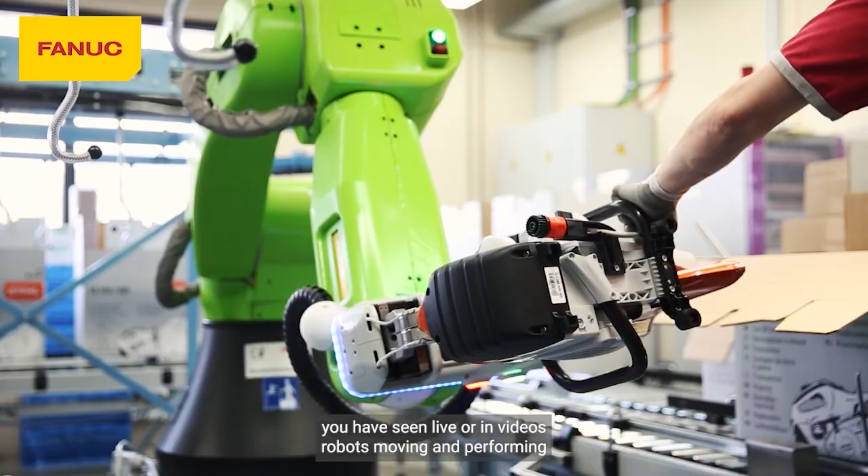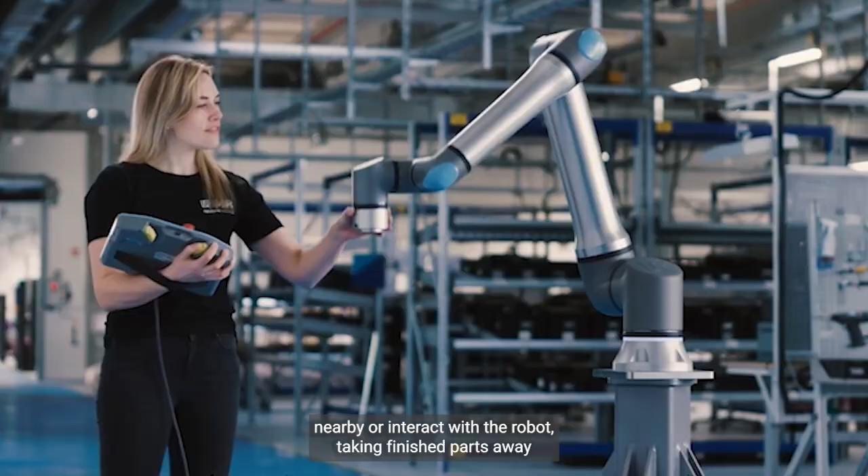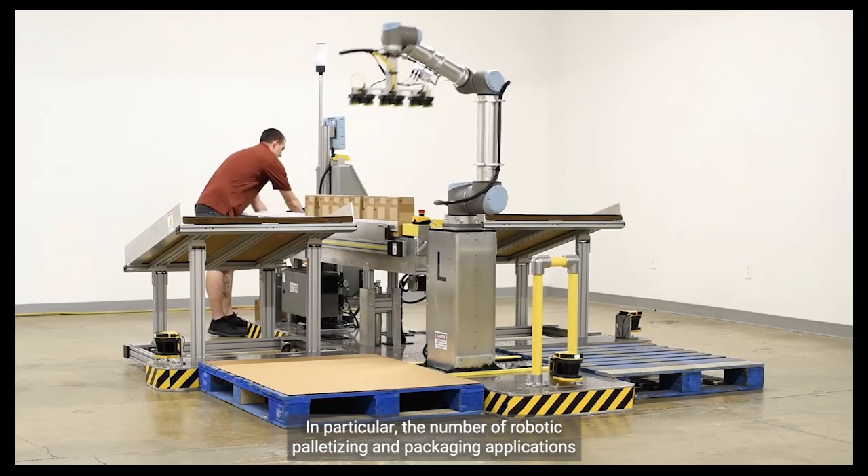Likely you have seen live or in videos robots moving and performing diverse operations without any fencing or other safeguarding around them. People just walk by, work nearby, or interact with the robot, taking finished parts away or placing raw materials on a work desk for the robot to proceed. In particular, the number of robotic palletizing and packaging applications that run without apparent safeguards is growing.

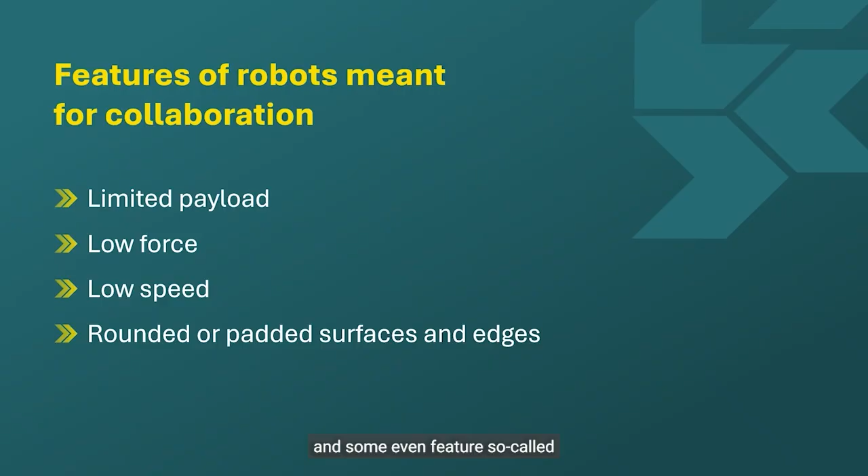The robots used in such applications have special features. Most important of these are limited payload, low force, and low speed. Some may come with smooth, rounded, or even padded surfaces, and some even feature so-called sensitive electronic skin that senses contact with the human body. The basic idea is to prevent injury upon contact between the robot and the human body.

Such robots are often referred to as cobots, a term derived from collaboration and robot. The term cobot is mostly used to advertise robots that allegedly can operate without guard fencing and protective devices like light curtains, laser scanners, etc.

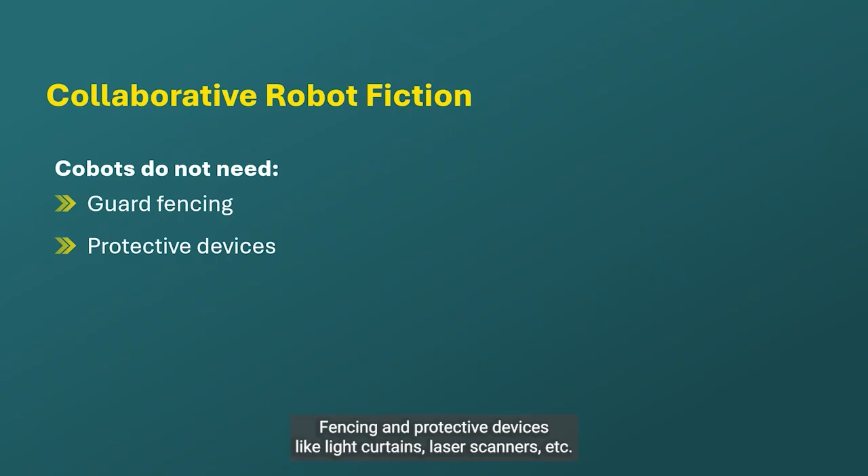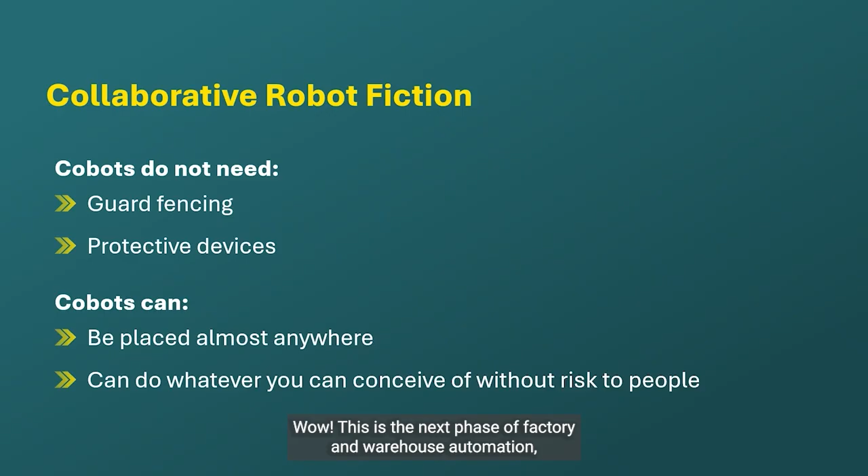Advertising videos show such robots operating almost anywhere. You can also see them on trade shows and fairs as they place products into crates and then stack them while onlookers stand right next to them. What is the impression you get? Wow, this is the next phase of factory and warehouse automation, only to be followed by Mr. Data and his Android colleagues.

But what appears to be a smart concept at first glance, in reality is a misconception, at least to some extent. Robots that will always work safely around people in any kind of application simply do not exist. It is not the robot alone that counts. Cobot is thus a somewhat misleading term that makes people believe that they do not need to give much attention to safety when such a type of robot is used.

Interestingly, the US and ISO standards for robot safety have never used the word cobot, and the terms collaborative operation and collaborative robot have been removed from the standard. Let's probe why. The new ISO 10218 standards published in 2025 and the US pendant ANSI A3 R15.06 use the term collaborative robot applications. This highlights that the application determines whether use of force and speed limited robots is safe or not.

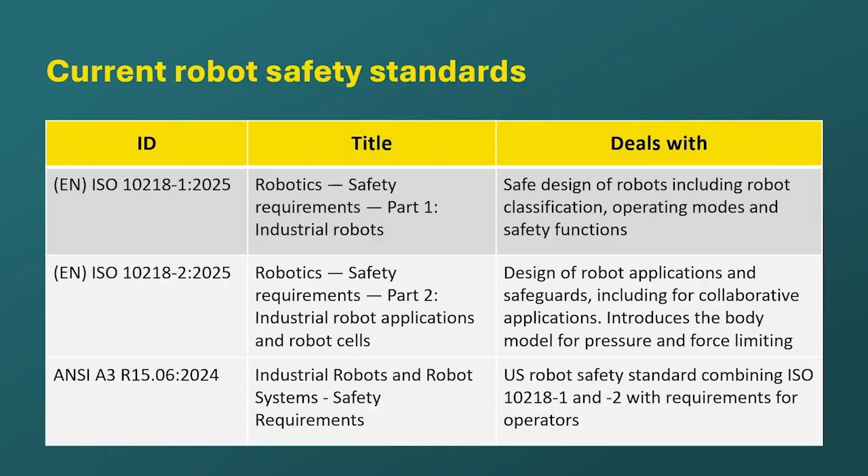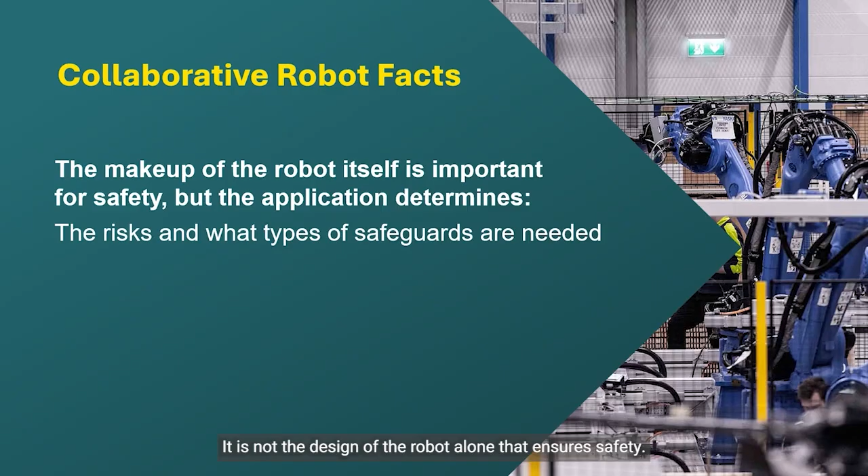Fact is that the makeup of the robot itself is important for safety, but the application determines the risks and what types of safeguards are needed to deal with them. It is not the design of the robot alone that ensures safety. The new standards list numerous factors that must be considered to achieve a safe collaborative robot application.

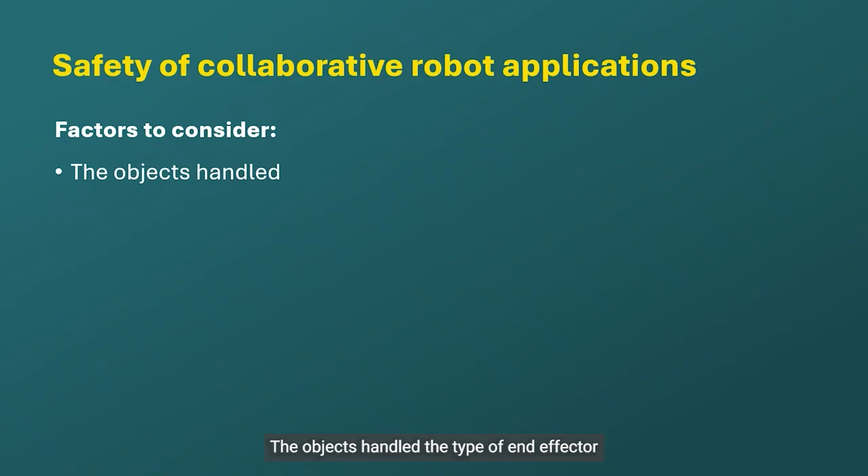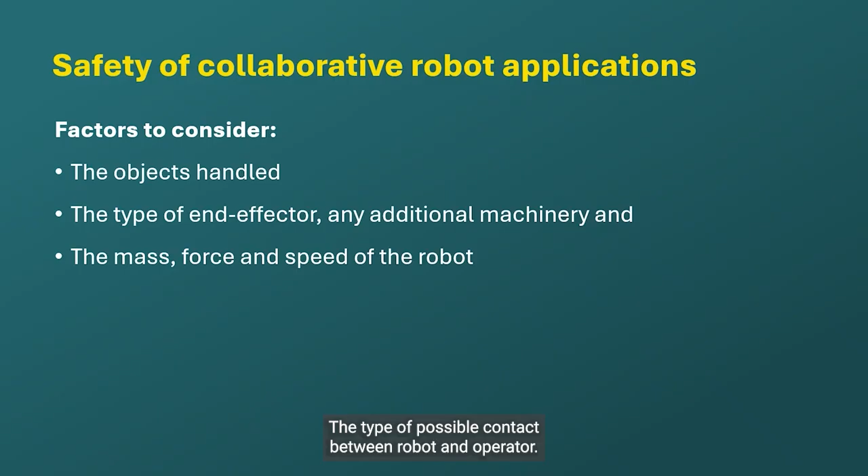The objects handled, the type of end effector - that is, the tool or manipulator - any additional machinery and equipment used in the application, the mass, force and speed of the robot, the type of possible contact between robot and operator, the body parts affected, the space available, the surroundings and even traffic, and the number of operators, bystanders or walkers. Together, these factors result in a complexity that needs careful forethought, risk assessment. We'll come back to that a little later.

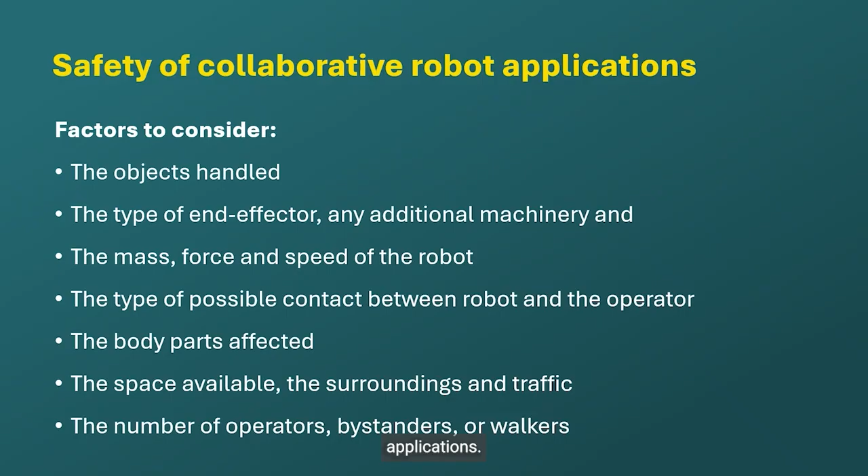Let's first look at force and speed reduced robots for collaborative applications. The new versions of ISO 10218-1 and ANSI A3 R15.06 differentiate two types of industrial robot. No, the differentiation is not between cobot and industrial robot, but between Class 1 and Class 2 industrial robots. Let's see. The difference between Class 1 and Class 2 industrial robots is in their manipulator weight, maximum force per manipulator, and their speed. See the values here.

Manipulator mass of Class 1 robots is max 10 kilograms. The maximum force allowed is 50 Newton. The maximum speed at the relevant tool attachment point is 250 millimeters per second. You may be aware that 250 millimeters per second motion speed is the limit set for manual operation of industrial robots. This is roughly a quarter of normal walking speed and thus quite slow.

The manipulator mass and force limits are new. These values are considered low enough to ensure that people will not normally be hurt upon contact with the moving robot. Consequently, the performance level requirement for safety functions of such robots has been reduced to PLR B or SIL 1.

Any robot exceeding these limits is a Class 2 robot. The standard PLR for robots in Class 2 is D or SIL 2.

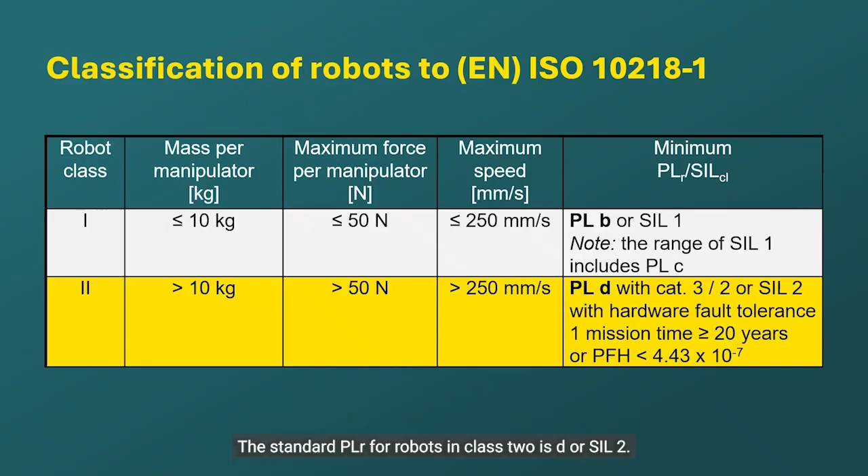Clearly then, Class 1 robots are meant for collaborative applications. But does this mean that simply selecting the right type of robot will automatically result in a safe application? Does it mean that you will never need to use guards or other protective devices?

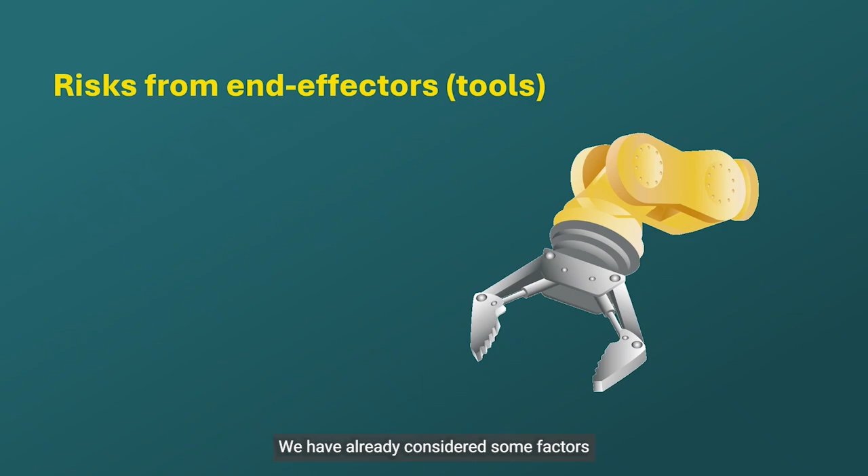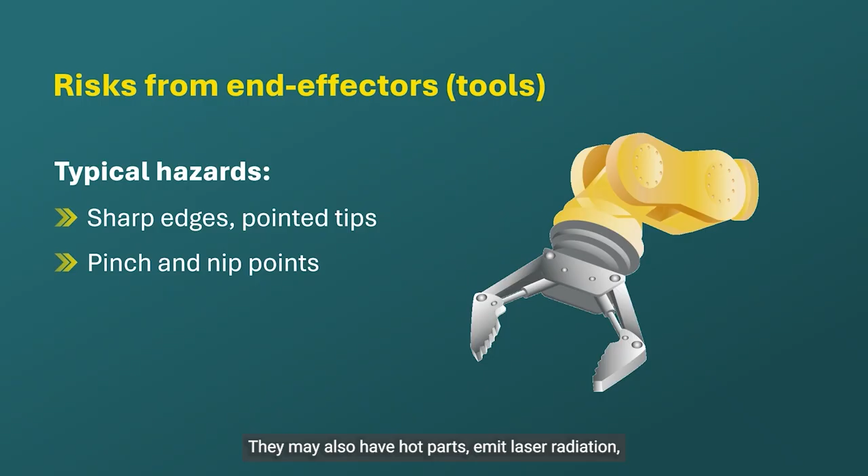We have already considered some factors that determine safety of collaborative applications. When you think of the wide variety of tasks that can be handled by robots, additional risks likely come to mind. The end effector, the tool of the robot, may have sharp edges or pointed tips that can cut and pierce, pinch and nip points. They may also have hot parts, emit laser radiation, or apply and inject hazardous materials such as adhesives.

Most of these risks can be controlled in some way. But there's an ingredient of collaborative robot applications that is much harder to predict and control: the behavior of operators and bystanders. The basic idea of a collaborative application is to have a machine and at least one operator share the same workspace. The type of collaboration may be sheer coexistence, but in most cases it will involve interaction.

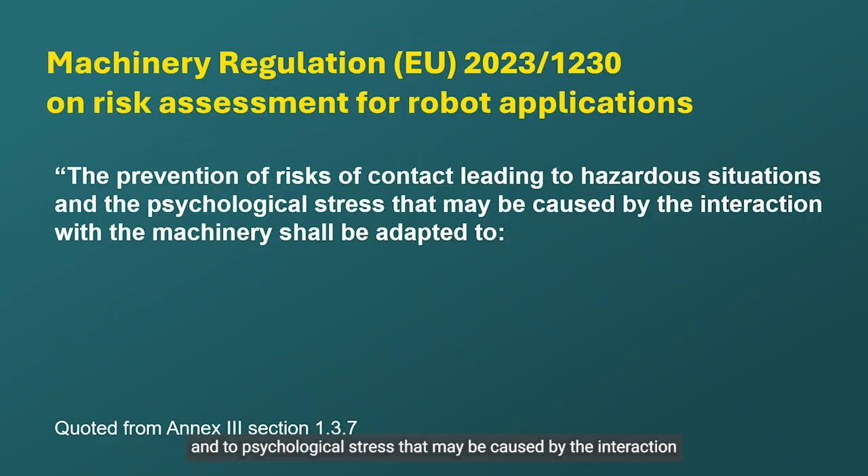The machinery regulation, applicable as of 2027 in Europe, therefore requires the following: the prevention of risks of contact leading to hazardous situations and the psychological stress that may be caused by the interaction with the machinery shall be adapted to A. Human-machine coexistence in a shared space without direct collaboration, and B.

Interesting enough, the MR focuses not just on physical harm, but also on psychological effects of working closely around machinery that is potentially hazardous. Technology should not scare people or make them feel uneasy, tensed, or on the spot.

Also note that the machinery regulation prompts manufacturers to consider not only the risks of interaction, but also those resulting from mere coexistence in the same workspace.

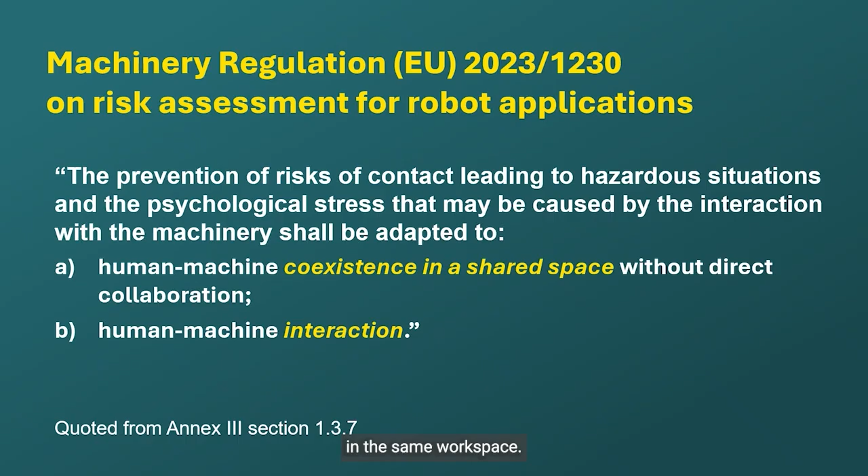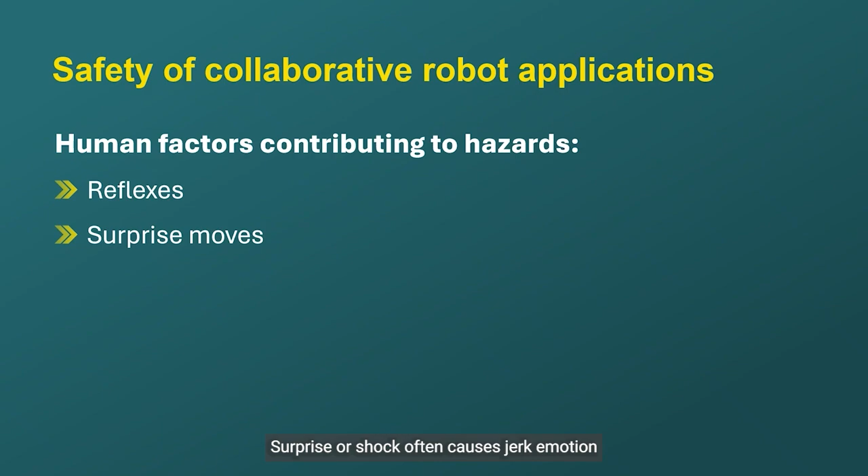Today already, a robot's next move may surprise an operator, and human reactions are often based on reflexes. Surprise or shock often causes jerky motion or a step in just the wrong direction. Also, people are sometimes distracted or may misjudge or misunderstand the operation and its safety limits.

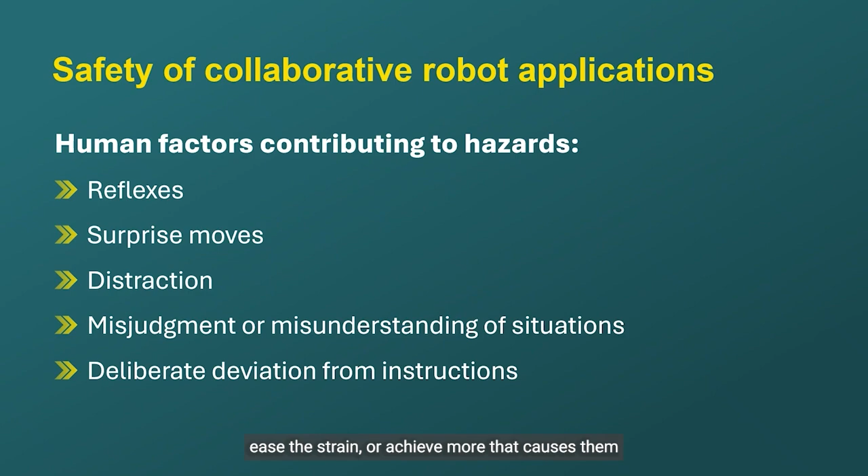And last but not least, operators sometimes deliberately ignore or deviate from instructions. Their motivation rarely is ill-willed. It is the natural desire to be comfortable with the work situation, ease the strain, or achieve more that causes them to take shortcuts that may become risky.

All these human factors may cause unwanted contact between robot and body parts. That may hurt or even cause injury. Therefore, note the 3 bottom-line safety rules for any collaborative robot application.

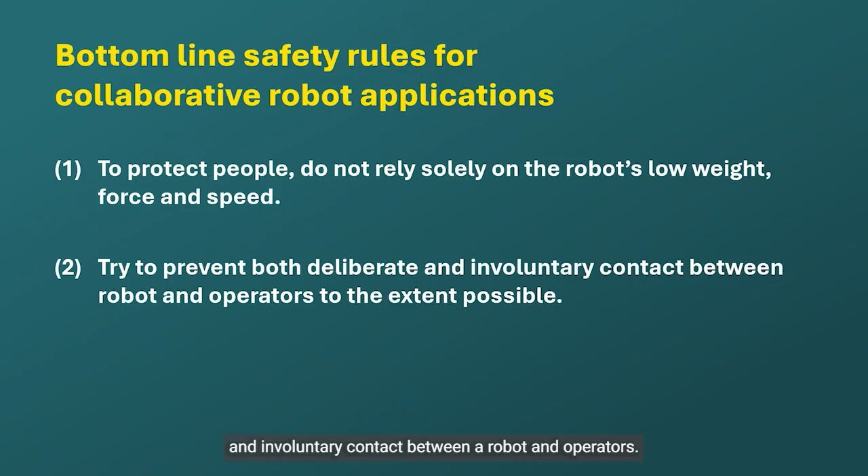1. To protect people, do not rely solely on the robot's low weight, force and speed. 2. Try to prevent both deliberate and involuntary contact between a robot and operators to the extent possible. And 3. Avoid moving a robot at a height that brings grippers and other end-of-arm tools near the head or face of operators.

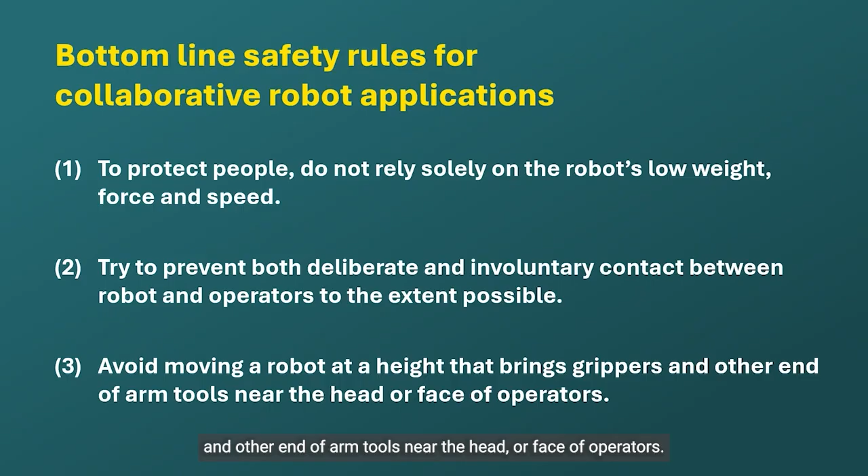These rules are set by the new ISO and ANSI robot safety standards. But how can we achieve safe operation? Risk assessment is the key.

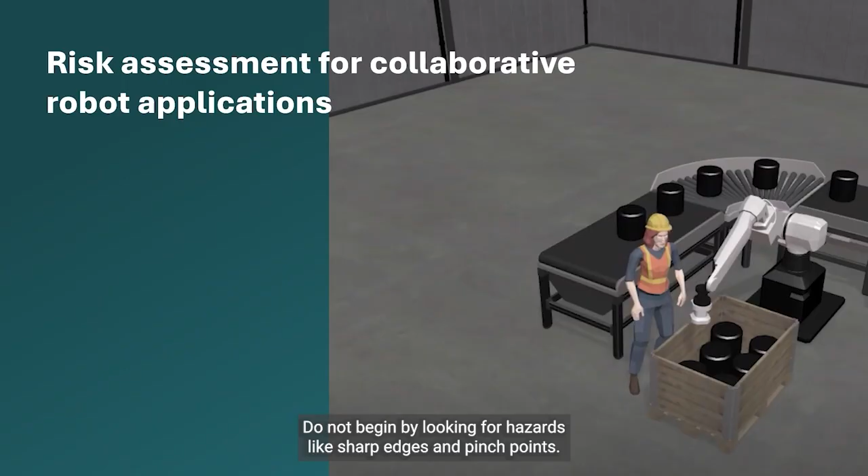Do not begin by looking for hazards, like sharp edges and pinch points. This is an outdated approach and ironically may lead to overlooking the very hazards you want to detect. Instead, start by defining the tasks to be handled by the robot and the operator.

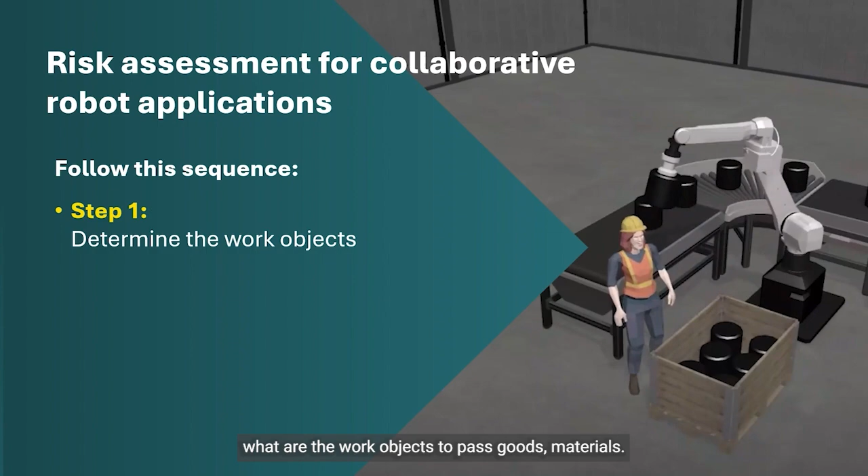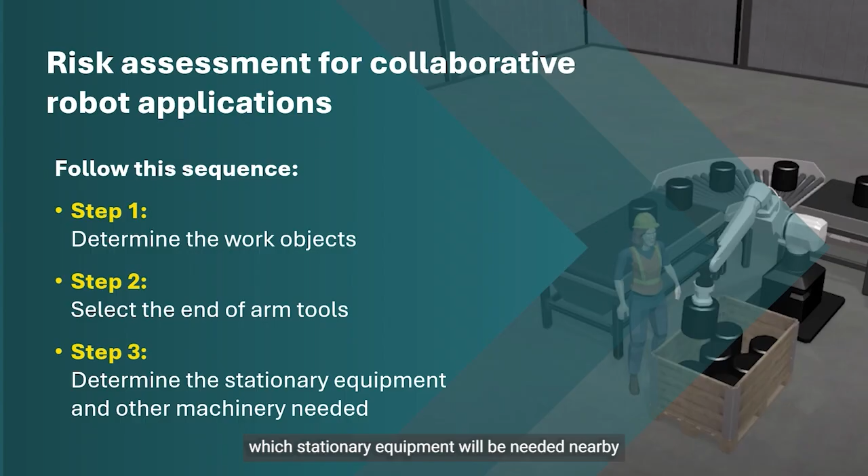Step 1. What are the work objects, the parts, goods, materials? Step 2. What end-of-arm tools will be needed on the robot? Step 3. Which stationary equipment will be needed nearby or on a desk? Will other machinery be involved, for instance, a conveyor, a lift, or a turning station?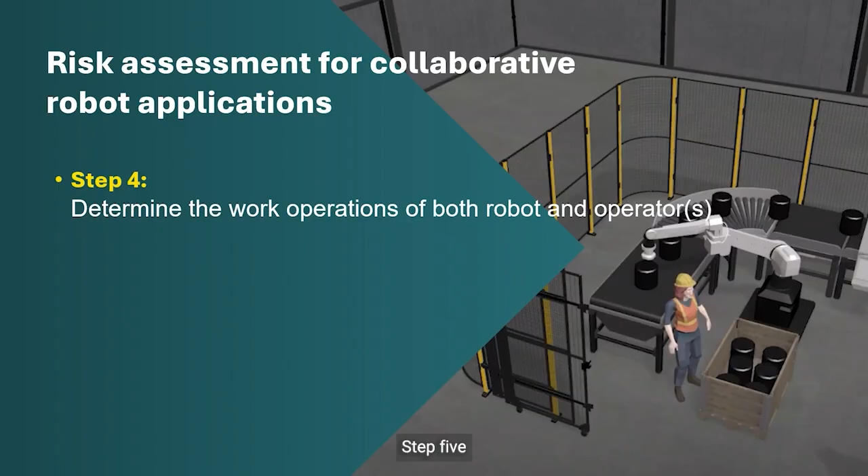Step 4. What are the operations to be handled by the robot, and what do you want the operator to do? Will there or could there be several operators? Step 5. How much space is needed and how much is available? Step 6. Only now are you ready to look for the hazards.

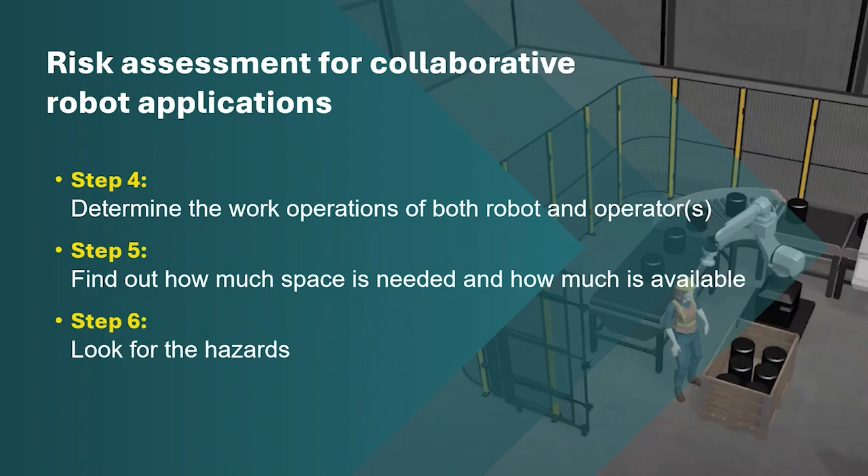We already discussed many of them. For a moment, let us focus on 2 types of hazardous contact with the robot that the new standards explain and set limits for. ISO 10218 mentions 2 types of contact: quasi-static and transient contact.

Quasi-static contact traps the operator between moving parts or between a moving and a stationary part. It may even prevent him from escaping. Squeezing, pinching, and drawing in are typical examples. The shape, the surface properties, and the force applied determine whether injury will result or not.

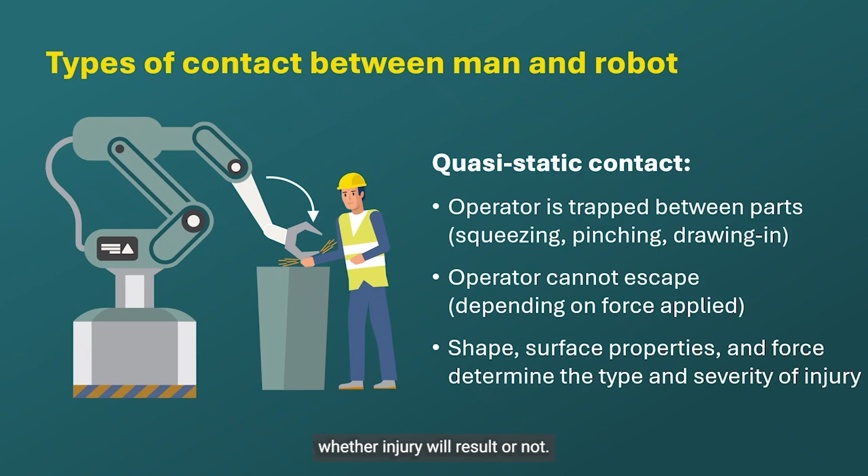A transient contact is temporary, usually short, and does not trap the person. Shoving, scratching, and cutting are typical examples. For these, the speed and impact energy are the decisive factors.

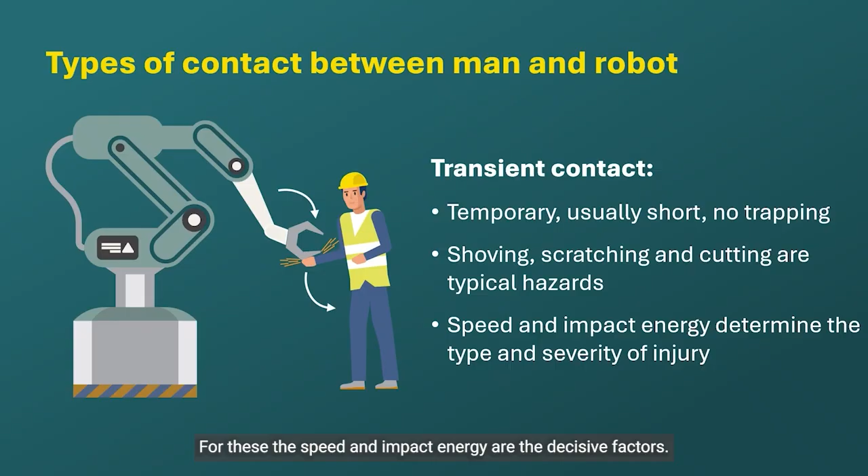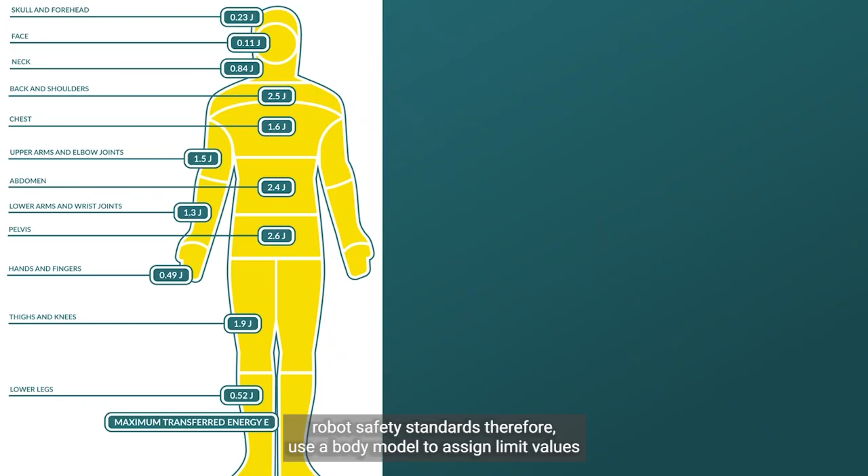And of course, the body part affected is crucial. There's a big difference between pressing on your finger with 50 newtons, the equivalent of 5 kilograms, or your face, earlobe, or eyeball. The revised robot safety standards therefore use a body model to assign limit values for both force and transferred impact energy to the different body regions.

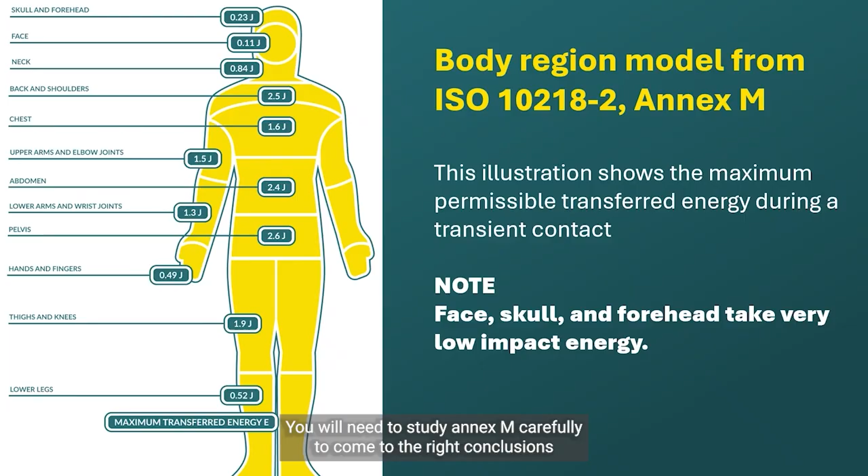These are also differentiated by the types of contact discussed before. You will need to study Annex M carefully to come to the right conclusions regarding the severity of hazards from contact of robot and man.

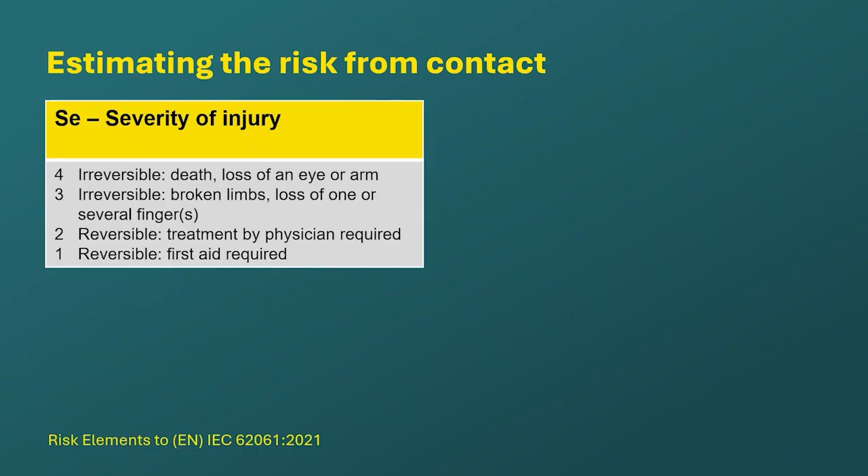Once you have a clear picture of the type of hazard, you should carefully estimate the risk involved. Consider the severity of injury, the frequency and duration of exposure, the probability of the system or operator failing to work safely, and the technical and human options for detection and avoidance of the hazard.

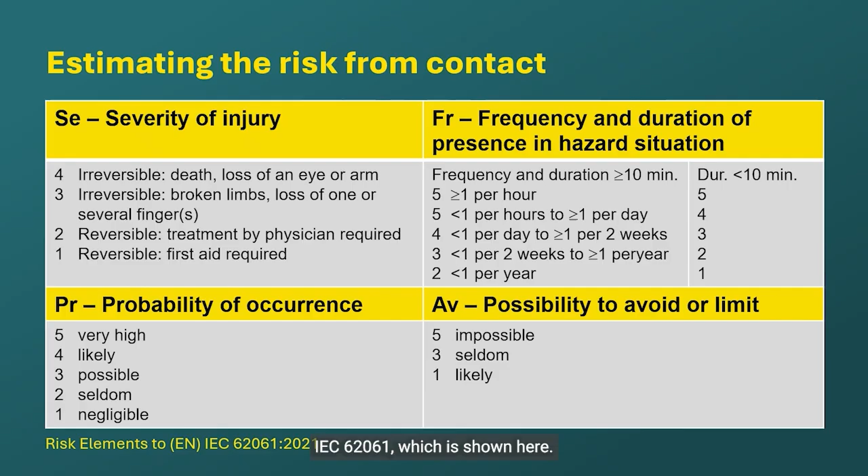Be sure to use a method that has all 4 risk elements and criteria with a reasonable resolution. We recommend the method presented in Annex A of EN IEC 62061, which is shown here.

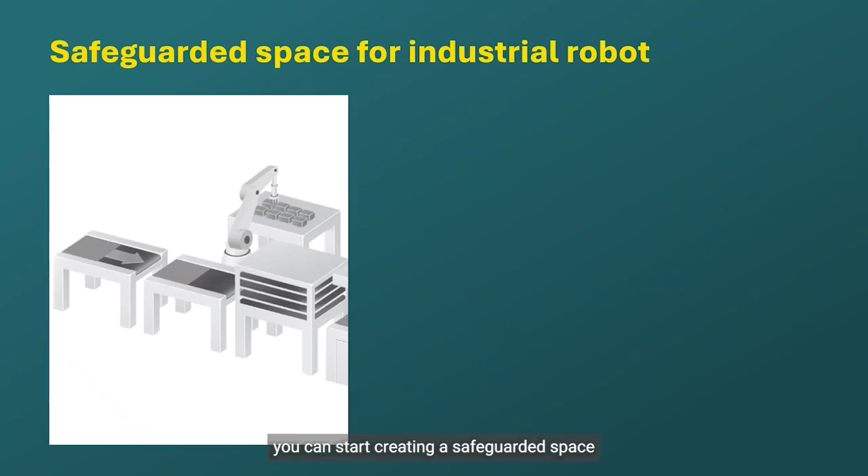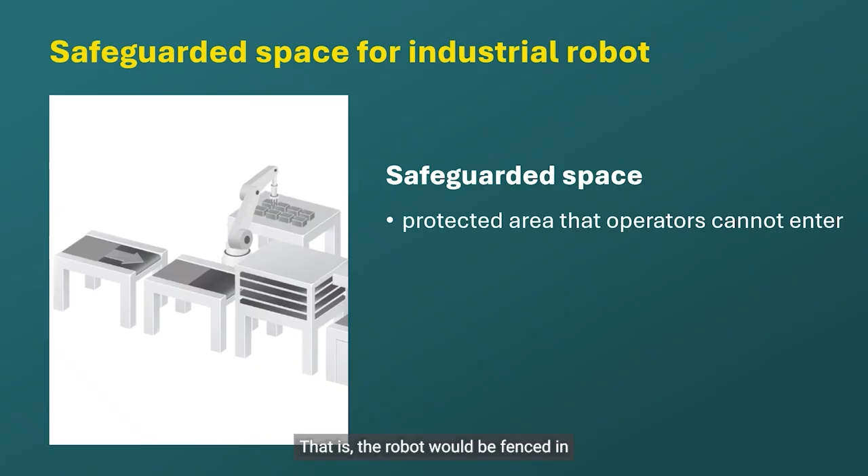When the hazard situations, the hazardous events, and the risk are known, you can start creating a safeguarded space for operators and bystanders. The term safeguarded space has been used in robot safety standards from the beginning, but classically refers to a protected area that operators cannot enter while the hazard is present. That is, the robot would be fenced in and access points be monitored.

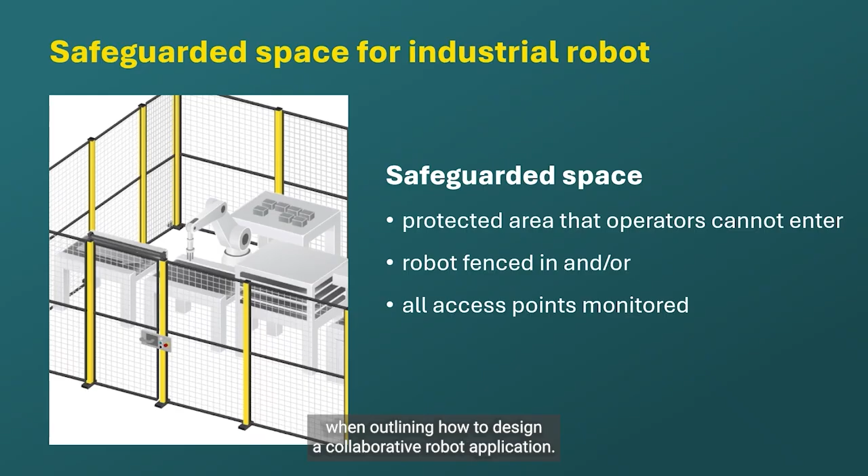For collaborative applications, these safeguards make little sense, but the new robot safety standards nonetheless use the term safeguarded space when outlining how to design a collaborative robot application. The aim is to create a space that is safe for the operator while he is there. That may even include barriers and fencing.

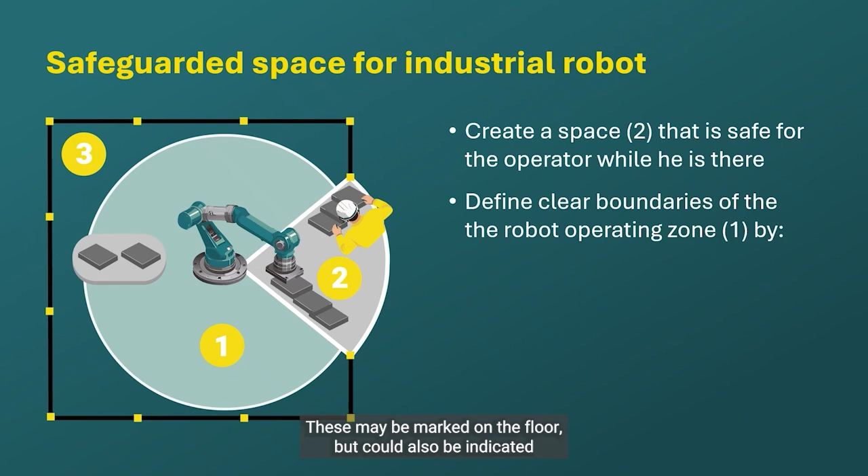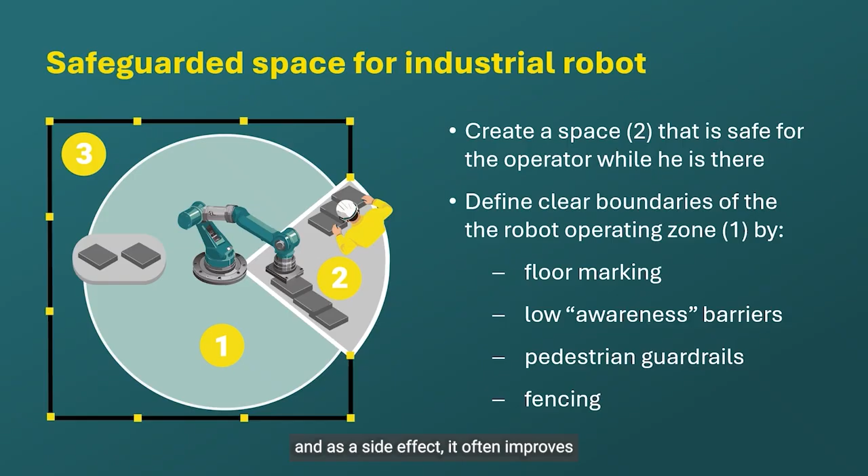The safeguarded space of a collaborative robot application should have clear boundaries. These may be marked on the floor, but could also be indicated by low so-called awareness barriers or impeding devices. Also, pedestrian guardrails and even fencing may be used. This will help keep bystanders and walkers outside the collaboration space, and as a side effect, it often improves efficiency of the operation.

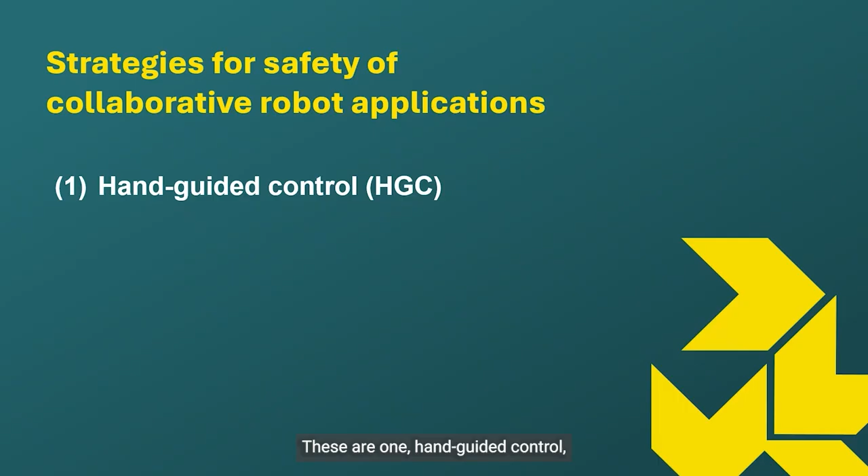The revised robot safety standards present a systematic approach to the design of collaborative robot applications. They list 3 basic safety strategies and numerous safeguards that you may choose from. These are: 1. Hand-guided control, 2. Speed and separation monitoring, and 3. Power and force limiting.

Hand-guided control is a fairly old technique mainly used to teach robots. The 2025 standards introduce more stringent requirements and safety functions for hand guiding.

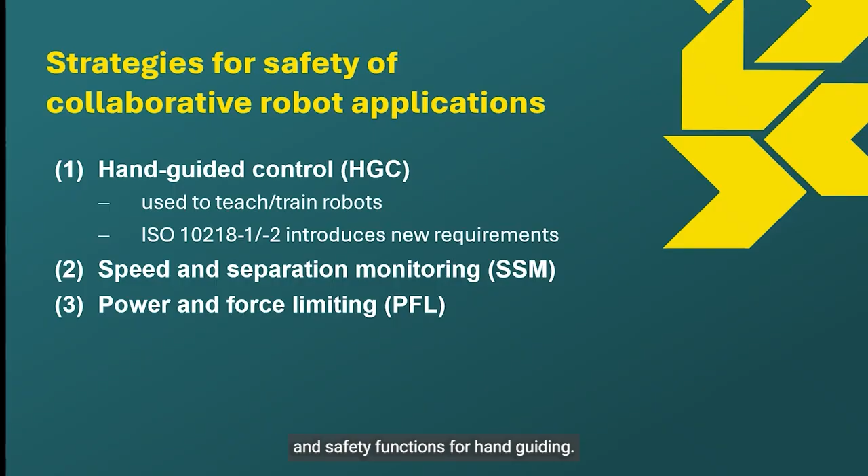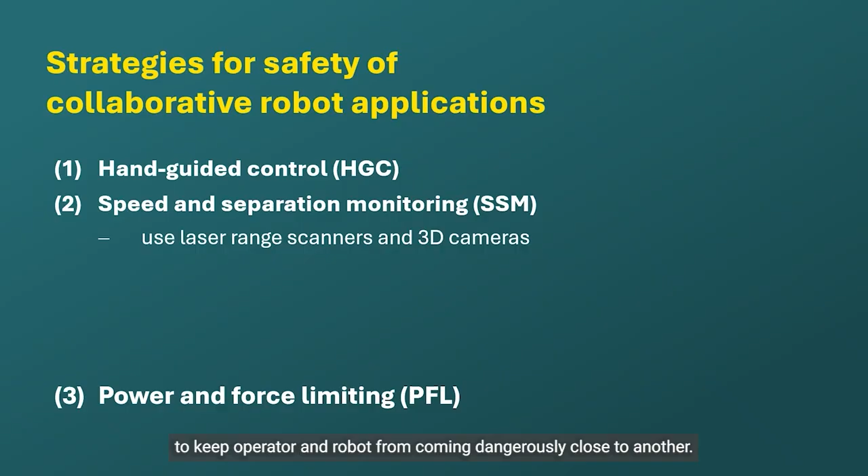Speed and separation monitoring relies on sensing equipment like laser range scanners and 3D camera systems to keep operator and robot from coming dangerously close to one another. This is particularly valuable where a phase with operator interaction and a non-collaborative, more hazardous phase are planned in the same application. In such cases, the transition from high-risk operations without the operator present to tasks with operator interaction must be monitored carefully.

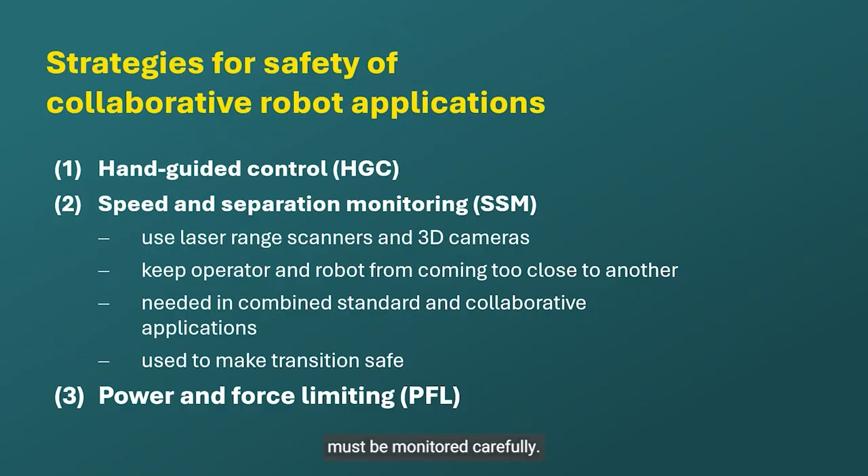Power and force limiting is based on the body model mentioned earlier. Where the results of a risk estimation indicate intolerable residual risk, one may add some measures, such as increasing the contact surface area, use of rounded edges and corners, smooth surfaces, padding, cushioning, deformable components, and reducing or limiting of the speed of moving parts and forces or torques.

Additional safety functions may also help. For instance, the time allotted for an operation may be monitored to ensure it goes well. If it takes too long, the robot stops. Presence sensing equipment can be used to determine the direction from which an operator may access the collaboration zone and at the same time communicate to the robot how fast a person is approaching.

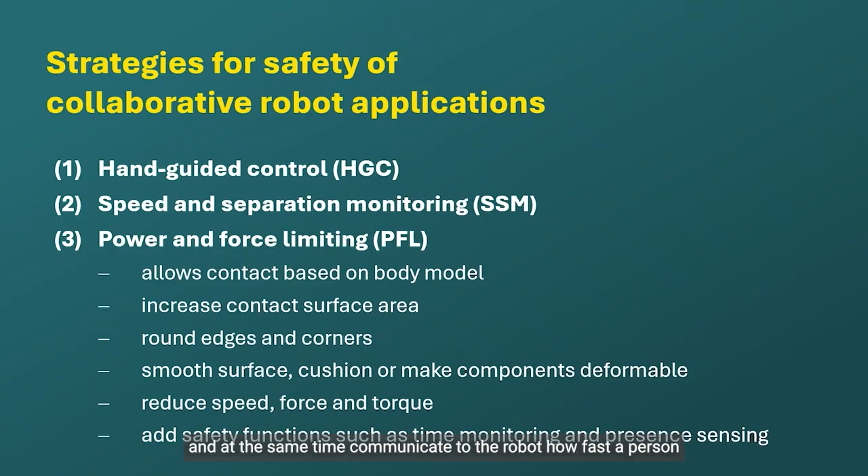In some cases, your risk assessment may show that coexistence or collaboration of an operator with a robot in your application simply is not safe enough, despite all the efforts made. What then? Go for classic robot automation safety measures, like guards and control systems like light curtains, laser scanners, and contact-sensitive mats. Try to prevent contact between man and robot.

Let me now summarize some of the takeaways from this webinar. Forget about cobots. Think applications. Do not think of a collaborative robot application as a limitless common workspace shared by a harmless robot and staff you would love to save.

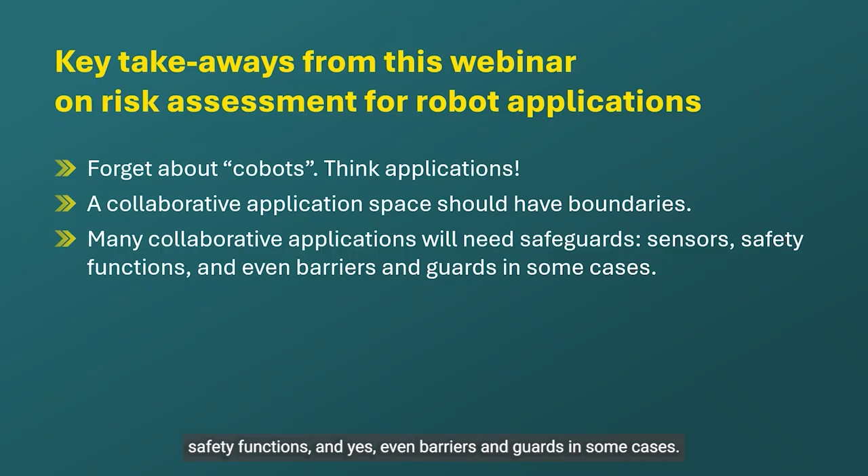As yet, there is no caring Mr. Data, neither stationary nor mobile. You may need serious safeguards, sensors, safety functions, and yes, even barriers and guards in some cases.

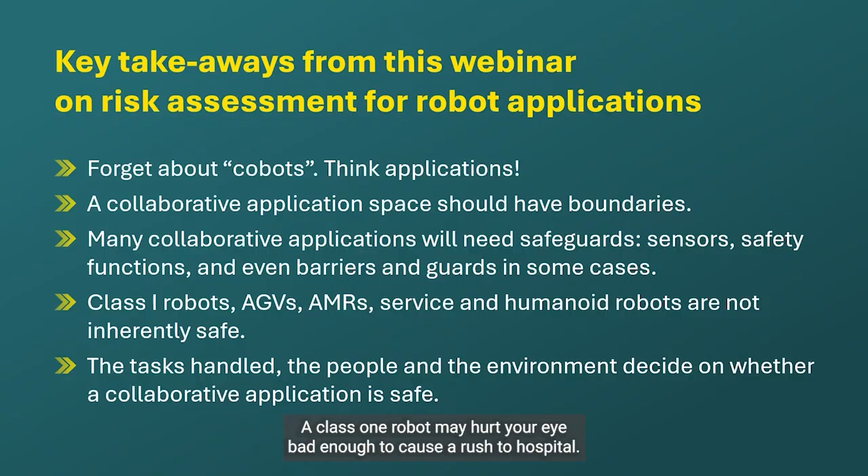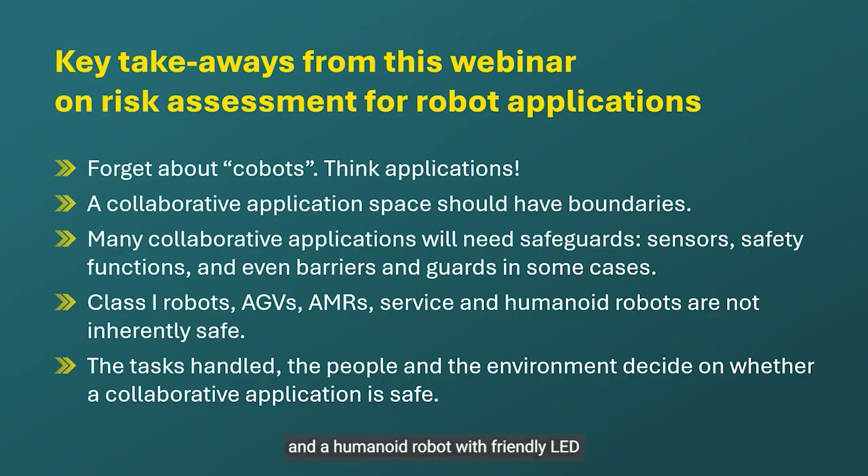Class 1 robots, service robots, and humanoid robots are not automatically or inherently safe, and likely they will not be for a while. A Class 1 robot may hurt your eye bad enough to cause a rush to hospital. An AMR with costly sensors may crush your foot while docking at a transfer station, and a humanoid robot with a friendly LED smile may gently shove you downstairs.

It's the task handled, the people, and the environment that decide on whether a robot application will be safe or not. Never cut corners when it comes to careful risk assessment. Yes, do your very best to create a safeguarded space that leaves people unhurt and makes them feel at ease at the same time. Stay safe with excellence.